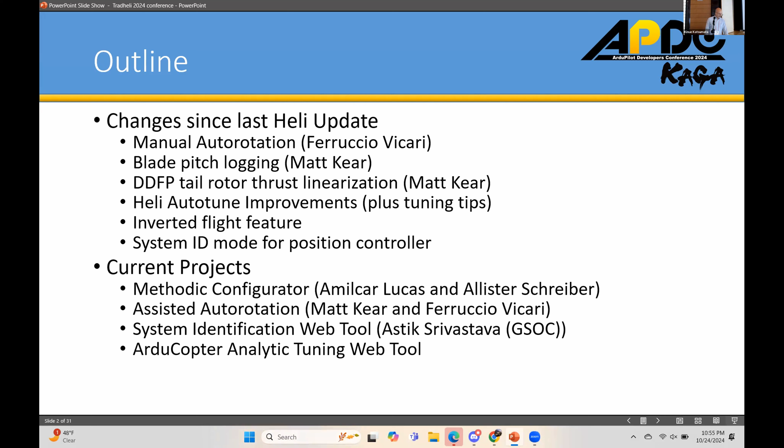As far as blade pitch logging, this is new. Matt Kear added it in order to track the actual collective and cyclic blade pitch on the swash plate that the blades are seeing. About 2 years ago, I added the ability for the controller to know what the collective blade pitch was, to have fewer problems with users not setting up. We had this parameter that told the controller to go no lower than this for the collective when you're on the ground, and that was a really difficult parameter for users to set.

So to make it more convenient and have a reasonable default value, I added the ability for the controller to know the collective blade pitch angle. Matt took it one step further and was able to have the cyclic blade pitch also determined by knowing the servo positions and deriving it from them. He added this as essentially logging only; the cyclic blade pitch is not really being used at the moment for anything in the code.

But you can verify that with the parameter H_SV_MAN: you set that to passthrough, and that allows you to verify what your collective and cyclic blade pitch numbers are before you go fly. And when you log it, you can come back and see. It's very convenient for those that want to see how close you're getting to your control limits during a flight. So it's pretty useful.

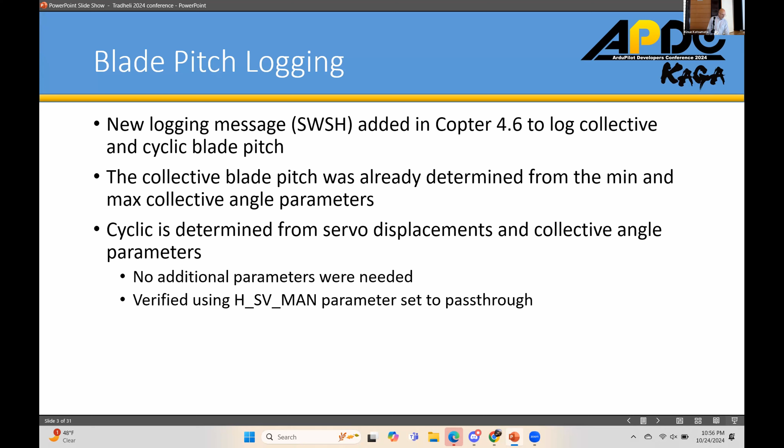Direct drive, fixed pitch, tail rotor thrust linearization. For those of you that don't know, we have several different tail rotor capabilities. There's the servo: it's a shaft driven tail rotor, driven off the main gear, or maybe a belt driven tail rotor. That servo basically changes the collective pitch on the tail rotor.

Then there's the direct drive, which is essentially like one arm of your multi-rotor turned sideways, right? It's a fixed pitch prop, and you're basically just changing the speed of the motor to make the thrust different. We never had any type of thrust linearization on there previously. You can imagine there's fairly good nonlinearity between the thrust being produced and the throttle position, because throttle is essentially RPM and thrust is a square of throttle.

So that probably created some problems for the folks trying to use that type of tail rotor, and for the control of that kind of tail rotor. So Matt Kear and I worked together. We got the DDFP in there, and I think Ferruccio was able to test it for me. Basically, it capitalizes off of what Leonard has in the motors library already. Pete brought it up to a common level so we're able to use it for both heli

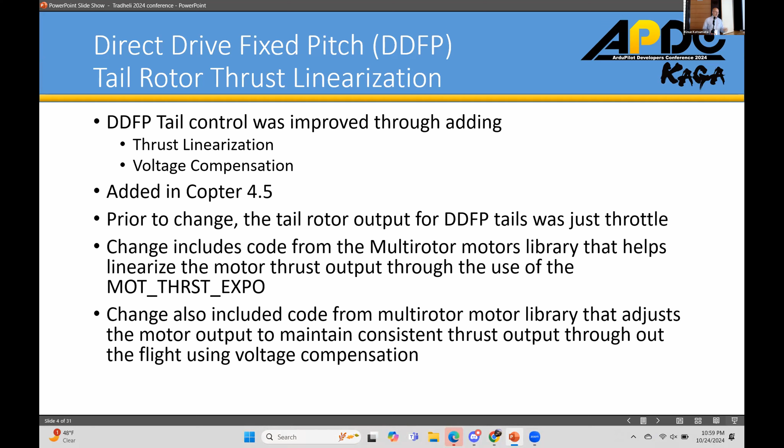So this is the inverted flight feature. Tridge implemented the inverted flight feature every bit of 7 to 8 years ago. It's a cool feature because it allows the user, in stabilize mode, auto mode, any mode really, to flip a switch and the aircraft goes inverted and its controls do not change, right? Raising the collective still causes the aircraft to climb, lowering the collective still causes it to descend.

Now, some advanced RC pilots might not like this because they're used to lowering the collective when inverted in order to hold a hover. But this makes it nice for new users or folks that just want to have fun doing inverted flight. The big issue with the original implementation was the loss of altitude in the transition; it was quite significant, probably 50 feet or more.

One of the things we knew about but never implemented was copter lean angle compensation. This is a big win on two fronts, not only for inverted flight, but also for normal flying in stabilize mode, where the lean compensation is helping the altitude controller manage the thrust being put out to maintain level flight or altitude while you're flying.

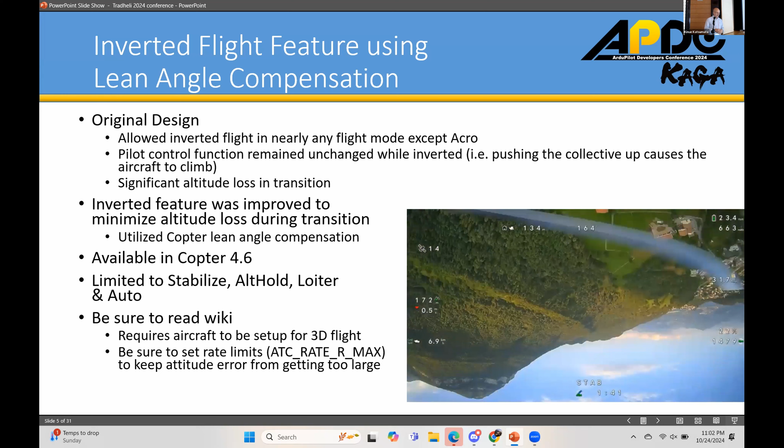All right, so off to Heli Autotune, auto-tune improvements. So a couple of things that were done with helicopter auto-tune. First, I'd already started working on angle P improvements to tuning the angle P gain. So that was back in 4.4.

And then recently, I got the itch to really try to improve the feed forward gain tuning. If anybody has done this, they'll know that the feed forward gain tuning was basically, if you're talking about the pitch axis, it would go down to 20 degrees nose down angle. It would then go to a 50 degree per second rate on the way up to 20 degrees nose up, and then it would come back to level. That was the old way that it was done.

So I knew that folks with larger aircraft didn't really care for that because it was a little scary with those large aircraft. Plus, the larger aircraft may have a tough time getting to that 50 degrees per second very quickly. So I improved that. I also looked at the max gain determination for rate P and rate D tuning. Changed how that chirp or frequency sweep is done. We'll talk about that really quickly.

And then the big upshot of all of this was I really went through the code, and back when I coded it up originally, there's a lot of inefficient code in there, and so I really went through and I was able to save 5K in flash through doing all this update.

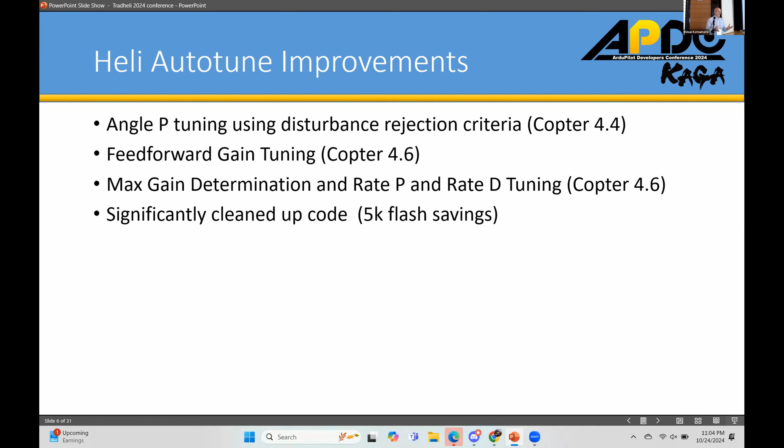So the angle P tuning and how I improved that. Previously for angle P, I was just looking at the attitude frequency response. It looks at the attitude compared to the requested attitude, and looks at the peak at the frequency where it peaks, and then adjusts it so that it doesn't go above a user specified value. Normally I told them, don't make it go above maybe 2 times. You don't want to have the response be twice the input request.

But in some of the research I've been doing, looking at handling quality specifications, it became a better idea to look at it from a disturbance rejection standpoint, because really the angle P controller is primarily helping out with angle disturbance rejection. And so there's a manned helicopter handling quality specification, Aeronautical Design Standard 33. It was developed by the U.S. Army. It's been around for years. They recently updated that to a U.S. MIL-DTL 32742 that is also out there.

And what they're looking at here, and what I used to tune the angle P, is how much overshoot do you have in the disturbance rejection. When the aircraft gets hit by a gust, in its correction for that gust, how much is it going to overshoot in the response? That's what this is looking at in a nutshell. And the criteria is no more than 5 dB, which is about 1.7 times the input request or the disturbance. Without going into too much detail, that's essentially what I changed the tuning to in order to tune the angle P controller.

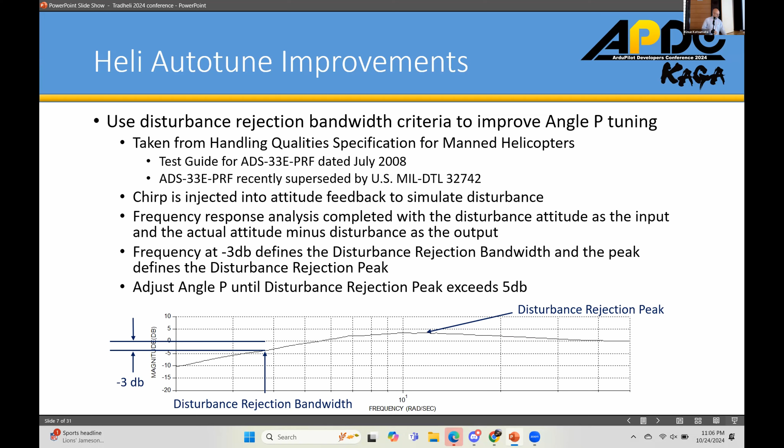All right. So the next thing was the feed forward gain tuning. Like I said, the original design was to get it into a constant rate, either in roll or pitch or yaw, and then determine what is the feed forward gain required to achieve that constant rate. But I decided that I could probably do this with a low frequency dwell. And so I implemented this low frequency dwell. It's a quarter of a hertz dwell.

Here, Ferruccio again has provided some video to show how this works. And this is a roll axis tuning. And you can see for helicopters, it's really highly coupled between pitch and roll, so you'll see a lot of motion in the pitch axis as well. It almost looks like it's toilet bowling as it's doing that back and forth motion. But again, this allows the auto tune to look at the response and determine what that feed forward gain is from that response.

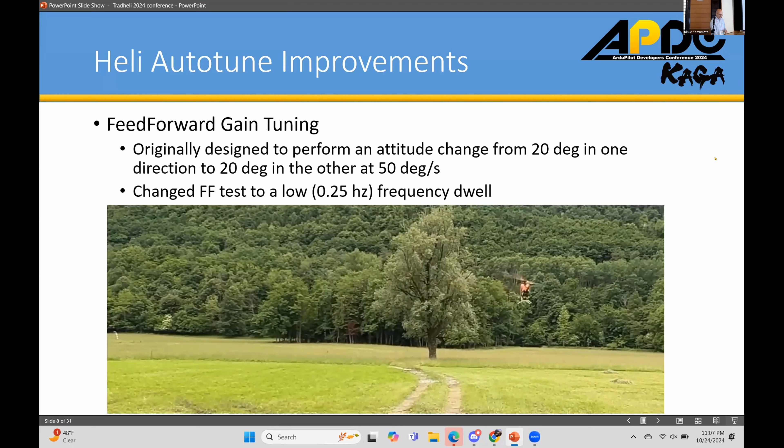For max gain and the rate P and rate D tuning, those gains, rate P and rate D, it originally was a rate-based sweep, meaning that the frequency, the chirp was done in rate, angular rate. So 50 degrees per second was what it's looking for. And that kind of gets scary because as you reduce the frequency, like I always started at about 10 radians per second or close to 2 hertz.

But if you went less than 10 radians per second, well, if you integrate that 50 degrees per second, as you go slower, the aircraft has more time to increase its attitude as you're doing at that lower frequency, and so it kind of gets a little scary. And so it wasn't good for larger aircraft where you had to go to lower frequencies.

And just from the experience I had, I knew that I could get away with just doing an attitude-based sweep. Then I could pick off certain parts of the code where I could get my target rate and resultant rate and be able to then do the analysis on that. And so yeah, I used the system ID mode chirp generator, and then was looking at the attitude. Did it based on attitude inputs.

And again, that says attitude controller feed forward disabled. That's basically the recovery roll, recovery pitch type inputs for SysID. It uses those because it basically gets rid of the input shaping and helps the controller look at the natural response of the aircraft.

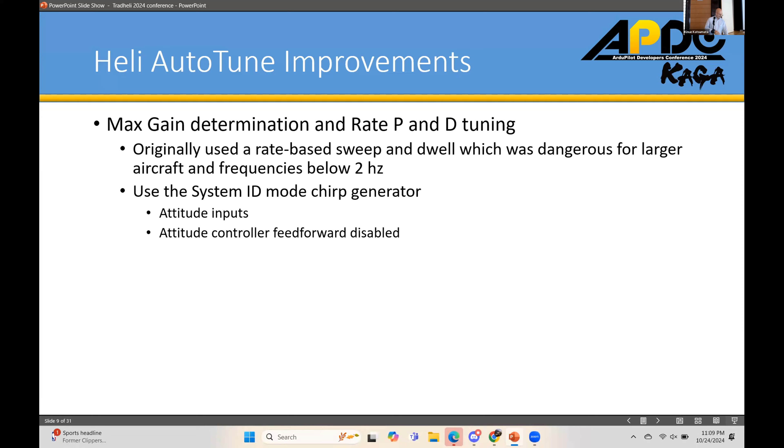Okay, some tuning tips for folks that may be tuning their helicopter. One of the biggest challenges for AutoTune in being able to tune helicopters is trying to deal with these lightly damped modes that the rotor essentially is really causal for. And so on the left here, I'm showing basically the bare airframe response, and you can see that it's flatlined here.

It's almost 0 degrees for a rate command, and so it basically means that helicopters are naturally rate command systems, right? You put an input for a bare frame helicopter, you're going to get a rate response, whereas multi-rotors are acceleration command, and that's why they're so difficult to fly without any augmentation. The biggest issue here though is at some frequency, I start seeing this peak, this 6 dB rise. It's like twice the output as compared to what I requested, right? But this is the unaugmented aircraft.

So now if I go down here and I look at where I have the rate controller, I've set my feed forward so that the output rate matches my requested rate. Now I still see this 6 dB rise, right? And so now when I try to add any type of P gain or D gain, P gain especially, that peak just gets higher. And so how do you deal with that? I found 2 ways that you could deal with that problem.

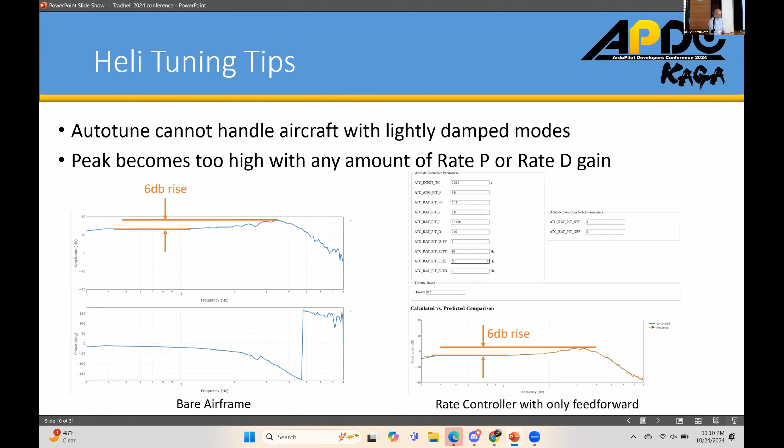First, in the left here now, I've added some P and D gain to show what happens to the response in the orange. The original response is shown in blue still, but the response in orange is where I said, well, let's go ahead and tune this up, I added some P and some D. You can see now I got close to a 10 dB rise, or like 2.8, whatever that would be as a ratio, but a fairly large overshoot, right? Almost 3 times the requested response. So how do I deal with that?

Well, one way, just for helicopters, that ringing or that overshoot is mainly on the attitude loops that it's excited, right? And it doesn't matter whether it's the pilot that's doing the input at that frequency or the attitude loops that do that input. Either one's going to excite that frequency and cause this response.

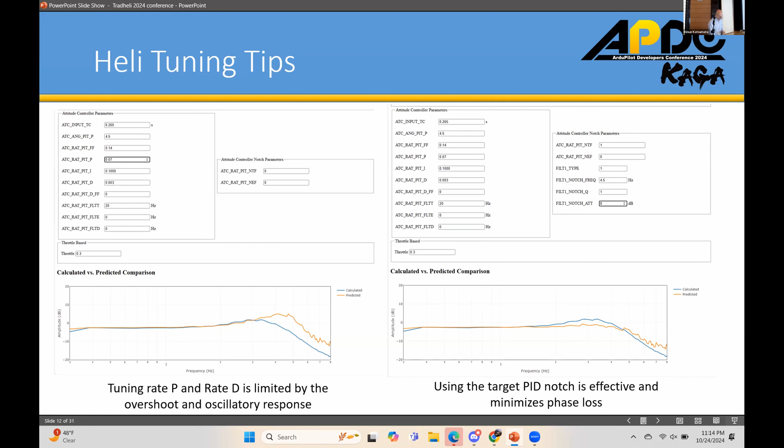All right, position controller system ID. I had done some research last year. I've been doing research in handling qualities for where the autopilot's in control. We're calling that automation qualities, right? How good is the autopilot controlling the aircraft, and how can we measure that? And so my research looked at a number of different metrics that we had to measure through doing frequency sweeps in the position controller loops.

And basically, you're looking at the position of the aircraft, right? The actual position compared to what the target position was. And then you're sweeping that and looking at it over frequency on the x-axis. I'll just look at the position one, the velocity target is similar, but let's just talk about the position one. We can calculate it in one of two ways, and this is one of them.

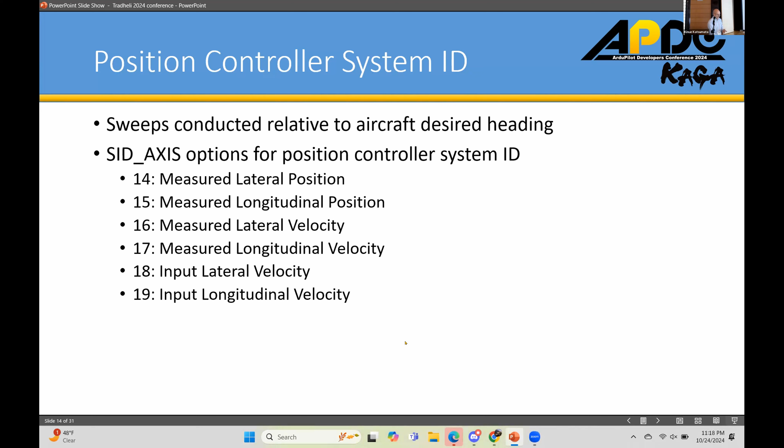One of the things to remember is that when you go into system ID mode with one of these axis settings, you no longer have control of the aircraft, right? It will stay in one position and do the frequency sweep on its own, and your inputs will not matter. So if for some reason the aircraft goes unstable, switch out of the mode. Go to stabilized mode, go to alt hold, get out of a position stabilized mode. Don't go to loiter. Get out of that completely and recover the aircraft, and then figure out why you got a divergent response. Most likely it's going to be your outer loop tune, or maybe even your inner loop tune.

The other thing about this is since you're looking at position, GPS is probably not going to have a high enough accuracy. You're going to need to use RTK, real-time kinematic, to allow you to get to accuracies below 5 centimeters. Probably 3 centimeters would be really nice, because look at my magnitudes I'm asking for: 30 centimeters, right? You don't want to go much more than 30 centimeters.

The aircraft's going to get too high of bank angles, and the response is not going to be very good. And the data probably would be somewhat tainted as well. So really only 30 centimeters is probably enough. You could probably go to 10 or 15 centimeters and you'd still be good and have that sweep. But that's why you need that RTK accuracy when you're doing it.

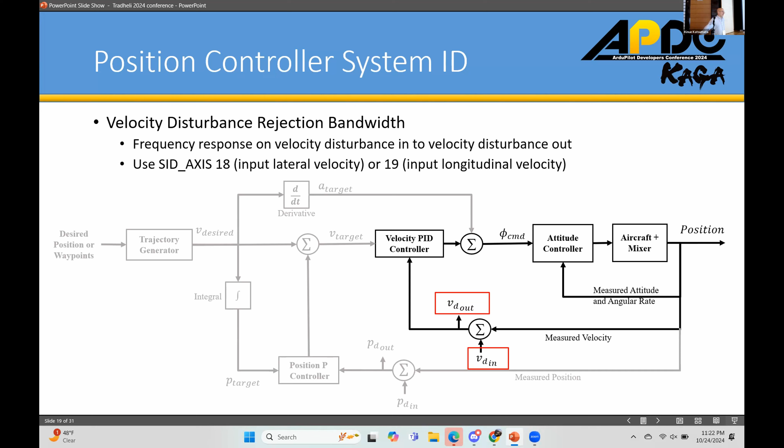For injecting artificial measurement errors? Yes. So basically, the chirp is going in. The VD in is where the chirp signal is going in and added to the measured velocity to make the aircraft think that it's seeing a disturbance, and then seeing how it responds to that to determine the goodness of its disturbance rejection.

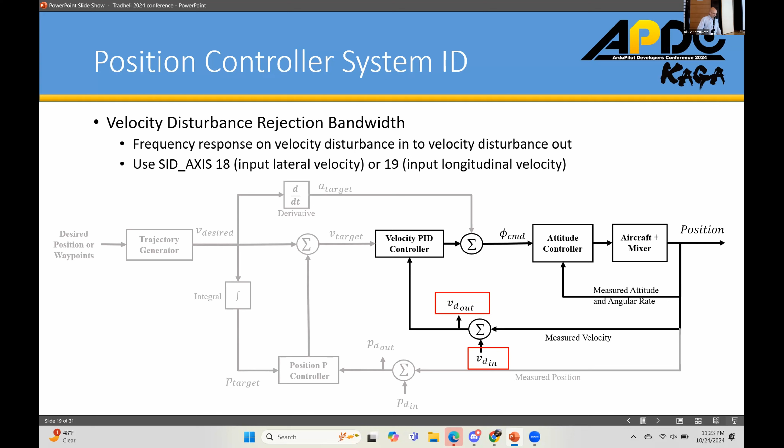Yep. All right. To wrap it up, future work in traditional helicopter stuff. So like I said, autorotation's kind of been a big push at this point. I know Ferruccio and Matt are probably going to be looking at this engine failure detection for automatic transition to assisted autorotation. Pie in the sky, big goal is at some point going to autonomous autorotation. And I should explain what they mean by assisted autorotation.

Essentially, the pilot is still in the loop, directing the aircraft laterally, but the autopilot has the collective and forward speed control. And so autonomous would be it's taking full control. It's going to guide itself to a point to land. And so that's kind of the pie in the sky where we would like to go with that.

Some other stuff that Matt and I were talking about was the ability to change head speed target in flight. Right now, we're kind of dictated to just one head speed. And in order to get better performance, there'd be the desire to reduce head speed in flight. And even gain scheduling based on head speed.

And then lastly, I had a lot of users that fly these smaller helicopters that have essentially fixed pitch blades, and so they don't do variable pitch, but can do some tilting of the tip path plane, so they can do not cyclic, but basically tilt the thrust vector, and then they want to be able to basically have the thrust change based on RPM, and I think that might be something we could probably do fairly easily and provide some thrust linearization in there to help it out, so that it's not so non-linear with throttle.

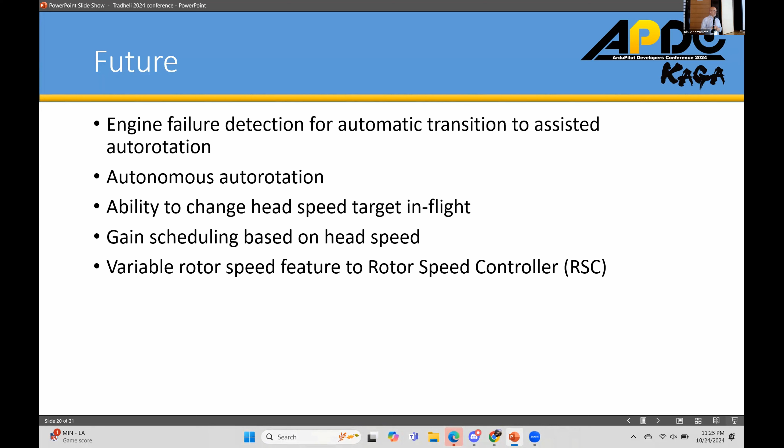So that's all I got. Any questions? Any other questions?

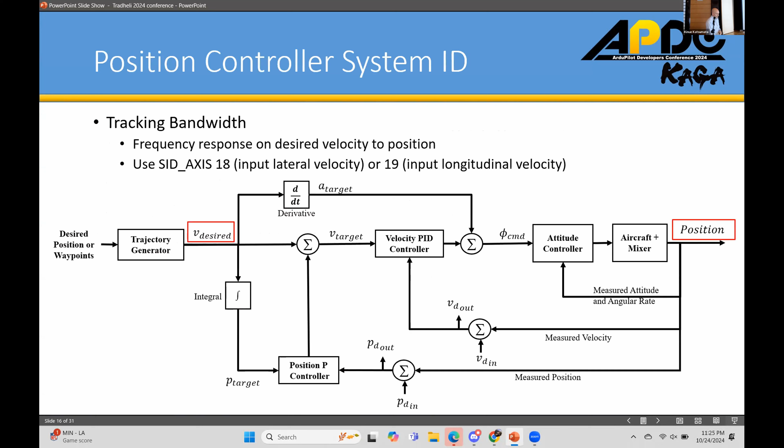Going back to the SysID on position, your recommendation was to set the SID magnitude for like 30 centimeters because of concerns over potentially pollution of the data. Can you? So basically, you're drawing a fine line between

potentially hitting some nonlinearities in the attitude controller and the position, because as you command larger movement of the vehicle, it's going to respond quite aggressively, and you're going to get larger attitudes. You could almost even hit the attitude limit if you set your attitude limit to 30 degrees. So you want to keep those displacements smaller.

I don't think noise was really ever an issue with the position controller. So you want to keep them large enough that you have good signal to noise, but not so large that you're getting to the peak of where it's really starting to respond. You're not getting much more than 10 to 15 degrees of attitude changes out of it.

So my follow-on question to that then is, because you're trying to assess the robustness of your automated handling qualities, if we've done it within that linear region, what about beyond? What if the vehicle does genuinely get pushed into those nonlinear regions? I mean, the spec really doesn't address that, and what we're doing even with the criteria is basing upon the fact that you're maintaining some linearity. Okay, thank you very much.

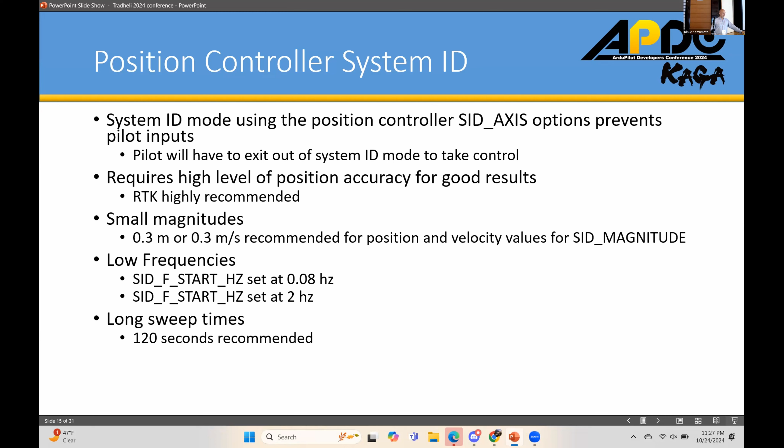I can potentially address that a little bit. When we get saturation or we hit those limits, the controllers are designed to recover elegantly from those saturated states. So when you get larger and larger limits, you simply get to a point where the controller is saying, okay, I'm now doing everything I can to move back to my target set point. And then once we get back to that linear position, we want to ensure that that last 30 centimeters is recovered elegantly. That's where all the fast response time comes in.

If you drag something off 10 meters, it's just going to reach its maximum speed, wait till it gets back to within that 30 centimeters, and then we get back to what Bill has characterized in how fast and elegantly we hit the spot. Yeah, well, just remember the position controller ID, are you saying that we're including shaping or not including shaping? No, I'm saying what you're characterizing is that last fast response.

Once we get into saturation, it's higher levels of the controller that deal with that saturation to ensure we come out of it elegantly and back into this linear region where you're characterizing. Ultimately, you want to stay out of that area, but that's where you have to really assess how much attitude you're getting out of the change in distance you're requesting. That's the key reason why Bill's saying you have to keep these inputs small, because we will hit that quite quickly.

And then a shameless plug, at the bottom of that one slide is the reference for the paper that my colleague, Dr. Ivler, and I published this past year on this research.